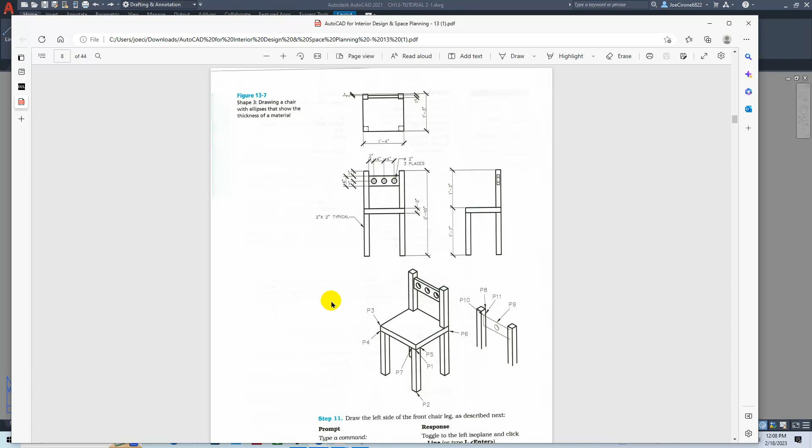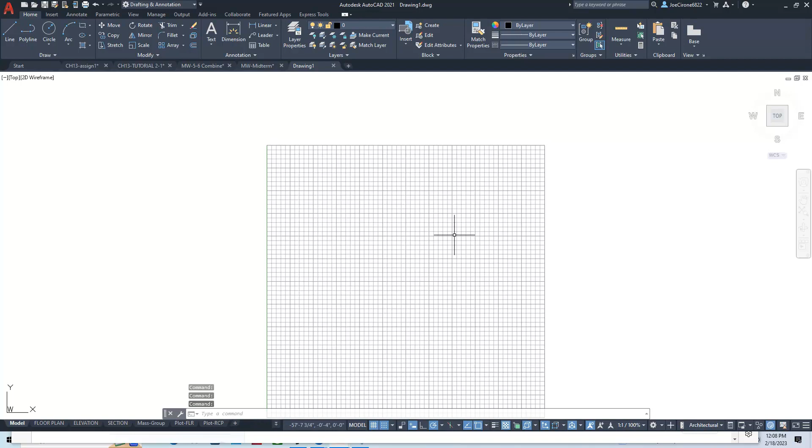But we're going to draw this using solid modeling techniques. Alright, let's get started. You're going to want to use a B-size architectural title block. We have the ARC templates located right here, and you can download the drawing template and open that file. Now, the thing about architectural templates and drawings is that we have the units set up in architectural units. If we look at the format for the units for this title block, it's set for feet and inches, or architectural units.

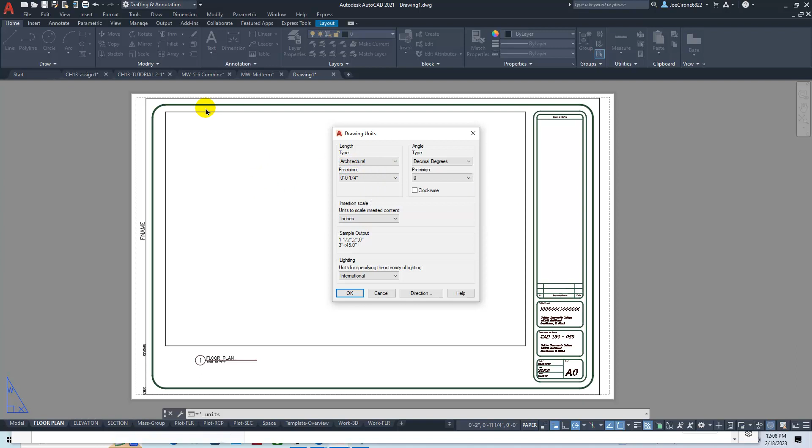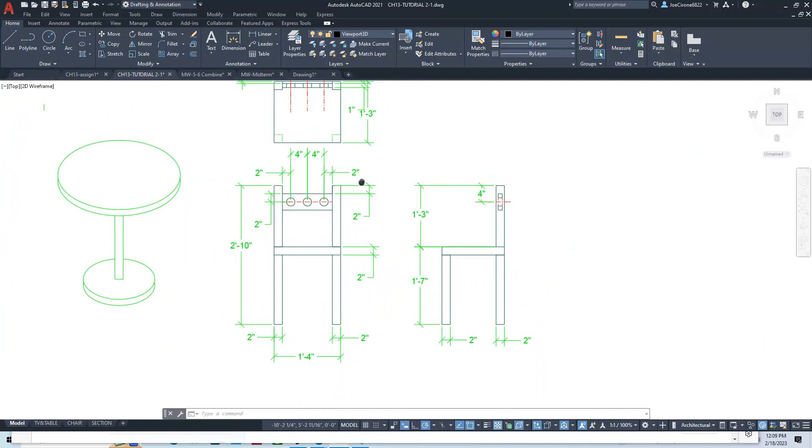Now I've already gotten a good start on this drawing. In a previous session, I went through and have the 2D geometry in the part modeled. So I'm not going to go through the actual aspect of creating the two-dimensional geometry, because I think we covered that in the 134 class.

But the idea would be to draw the object on a furniture layer or an object layer, complete the 2D geometry with the front view, the right side view, and the top view, and then to dimension that two-dimensional object in model space, and then to create a viewport where we would have our two-dimensional geometry shown in the top view, and then we'll create another viewport for the 3D. So let's get started.

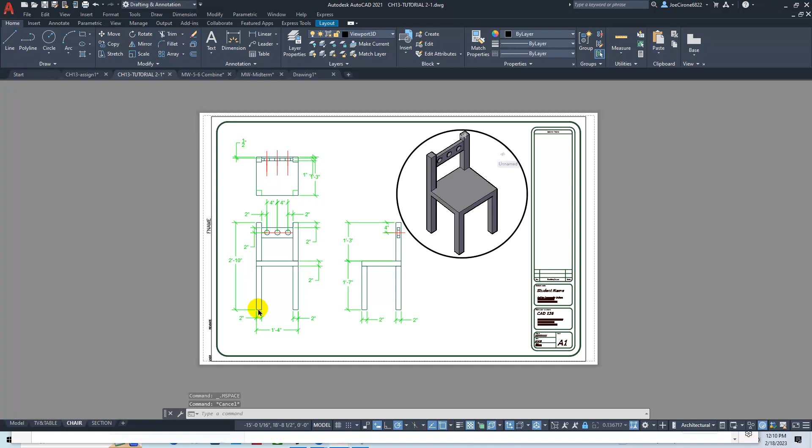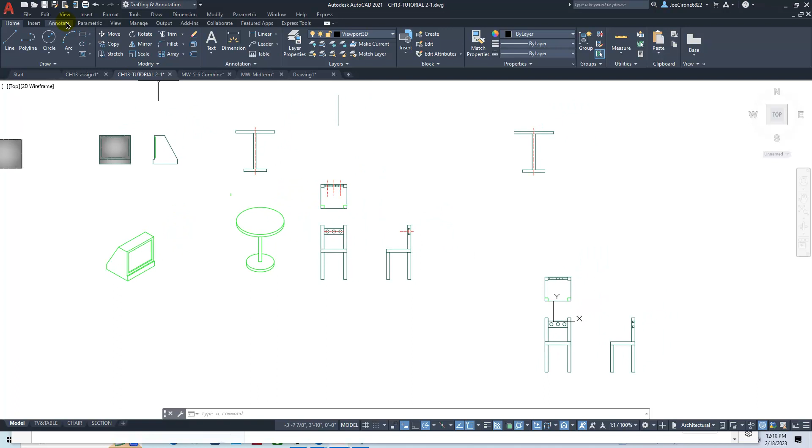If we come back here to the model space, I can toggle off my layer with my dimensions here. I'm just going to turn off my dimension layer. And then I'm going to copy that geometry to an area somewhere on the screen where that's not going to get in the way. So I'm just going to select those, we'll copy them, and then we'll go over here and we'll paste it.

Alright, so we have our geometry for the chair, and it depends how we want to model this. If we want to start off by modeling this from the top view, we can model the height of the chair legs, and then the seat along with the back of the chair. So I think we'll try that from the start.

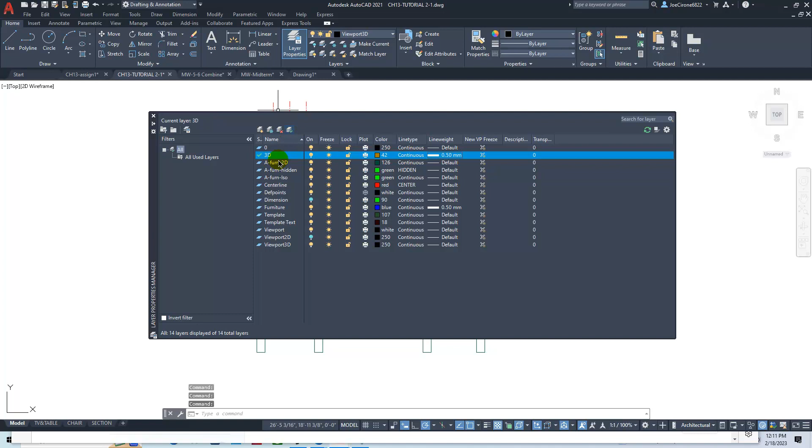So what we'll do is we'll create a 3D layer. You can choose a color that you would like. I'm going to choose this brownish color. I'll use a continuous line type for that, and I'll put a line weight of 0.5 millimeters on that, and I'll make that the default. I'll close out my layer, grab an isometric view, and zoom in on that area.

Then what we're going to do is start to create the model for that. We can go ahead and use press pull to pull those legs up a height of 2 feet 10 inches. So here's the back legs - they go up 2 feet 10 inches. And the other legs go up 1 foot 7 inches. We could subtract 2 inches off of that if we wanted to model to the bottom of the chairs, which I think I'll do.

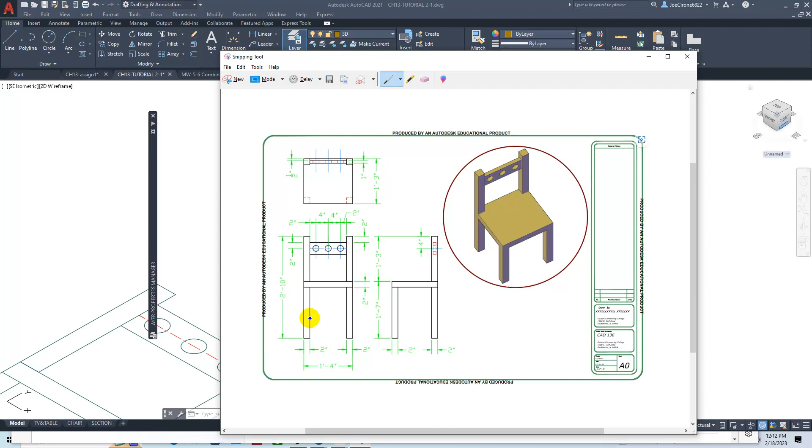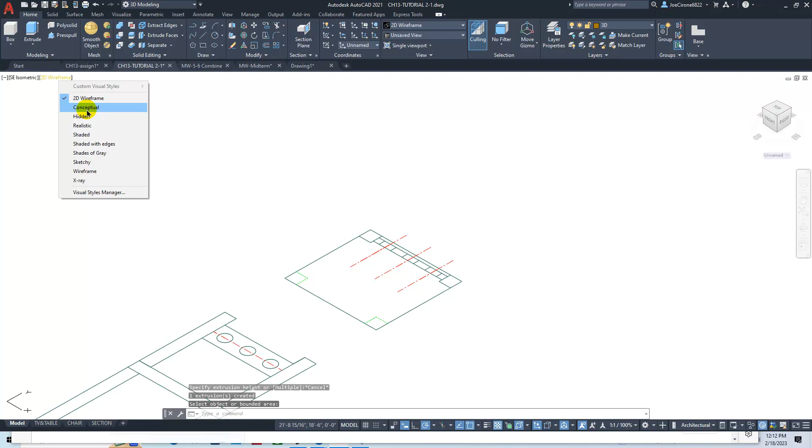So let's start off with the back two legs, 2 feet 10 inches. We're going to use a 3D modeling workspace, in our 3D layer. If we press pull, we can see how that geometry is starting to move up in that direction. We can do this in conceptual - sometimes I'll toggle back to wireframe, because wireframe always works, and when you're in conceptual you can get some graphic card issues depending on your computer.

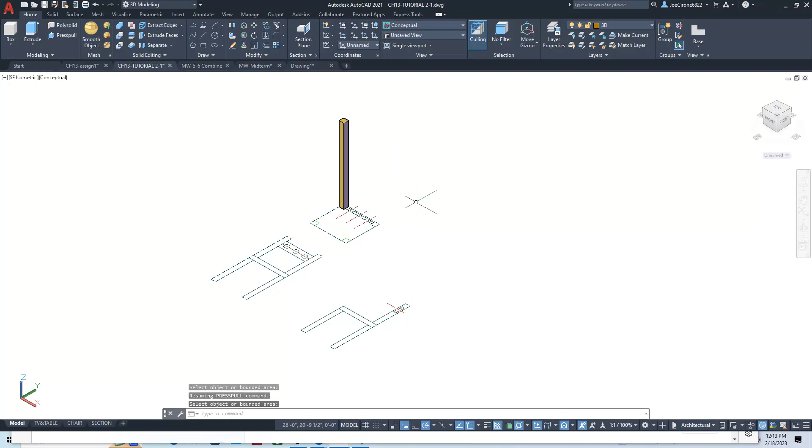So we'll press pull this up a height of 2 feet 10 inches. You don't have to put the quotes on it for inches, it's the default. It'll bring that up 2 feet 10 inches, and we can do that again for the other corner.

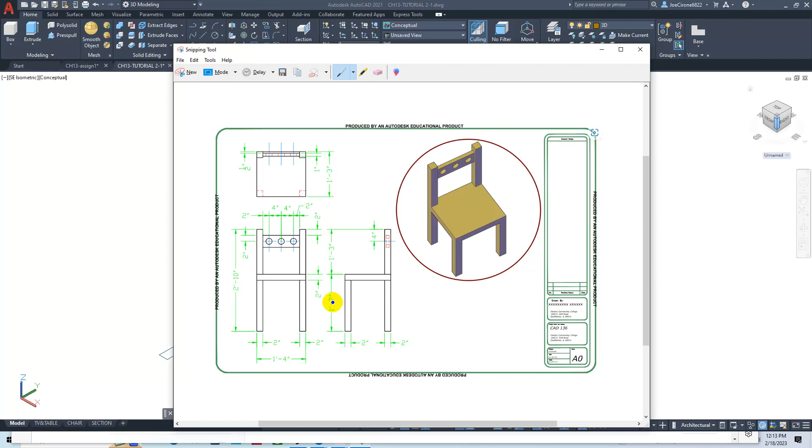Then what we're going to do here is bring up the other two legs, and those are going to be a height of - we're going to make that 1 foot 7 inches, but we're going to take the 2 inches off, so we'll make it 1 foot 5 inches for these two front legs. Again, we'll just use press pull.

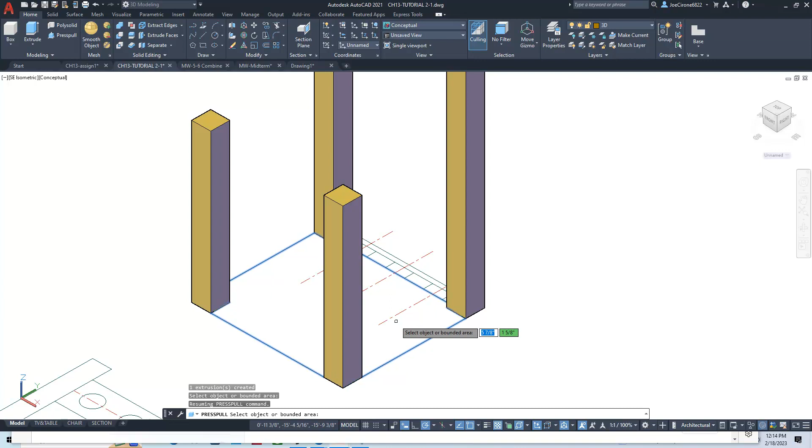For the boundary of the chair shape itself, I'm just going to draw a rectangle around the perimeter rather than sort through all the geometry that I have here.

If you hold shift and push the middle mouse wheel, you can orbit, kind of like you're playing an Xbox type of game. I prefer that method to navigate around rather than going to find the view orbit icon.

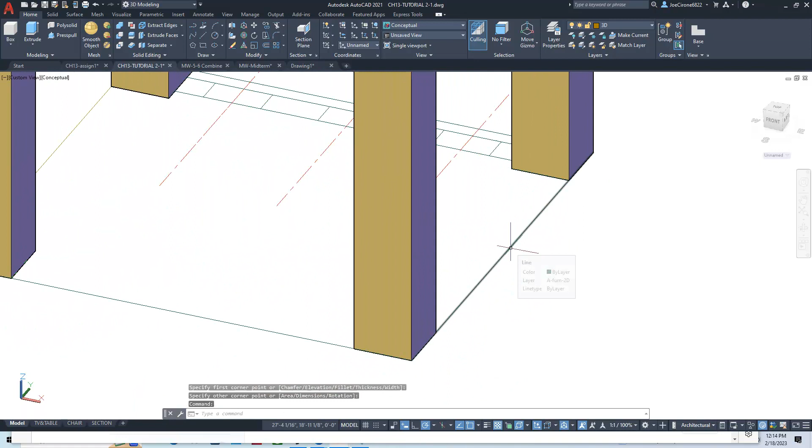It's just quicker. So I'll create a rectangle from this corner to this corner. Then I'll take that rectangle I just created - and that's not it, I'm going to delete that line. It's underneath it. Sometimes you'll have lines on top of lines - you either put them on a layer that's turned off, or in this case I just erased it. You can always get it back and draw another one.

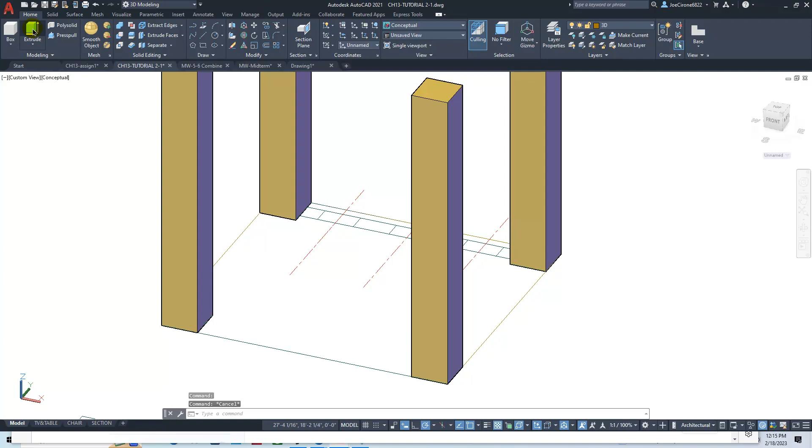Now I'm going to move that, and there's a couple different ways we can do it. If we use press pull, we may get interference from other geometries here. If we use extrude, we can extrude it right here on the floor, up 2 inches, and I think I'll just go with that for now.

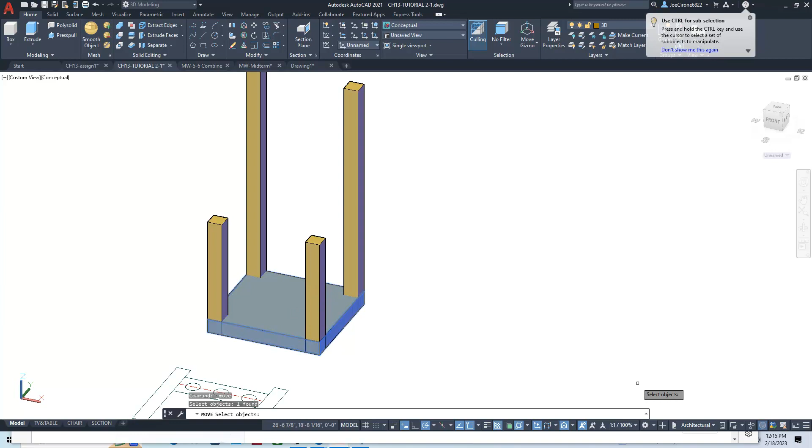In the simplest terms, we can just use move with object snaps, working in the three-dimensional element. So we'll select the move command, a regular move - it works in all three axes - and take it from this corner to this corner right here. Now we've completed the location for that.

Now these are activities here. Since we've modeled it with solids, we can actually union these together, and then we'll have a solid shape that we could 3D print. Right now we've just got these pieces and they're all independent, so I can move them wherever I like.

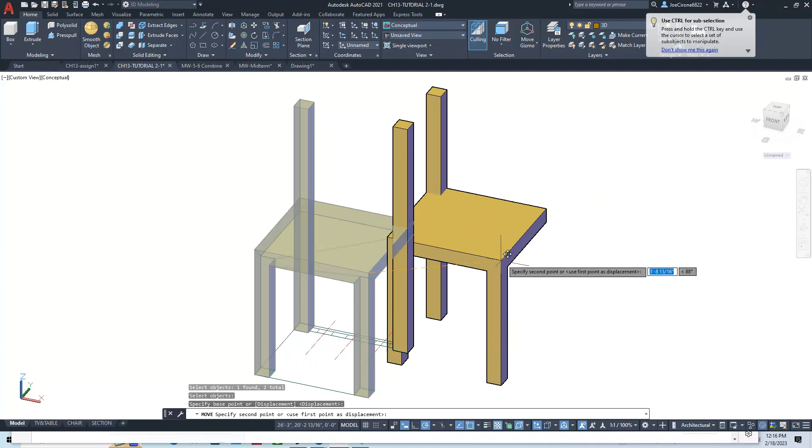Same with the legs on the chair. But if we fuse them together, if we glue them with union, we can union the chair to the legs, and now you can see we've got a bond there. If I move it, you can start to see it's starting to come together. That last piece, I don't know why it came together - I think I grabbed through it.

But we'll union that as well, and you can see it highlights the parts that are fused together, or glued together. Then we'll union the back of the chair. All right, so that's that component.

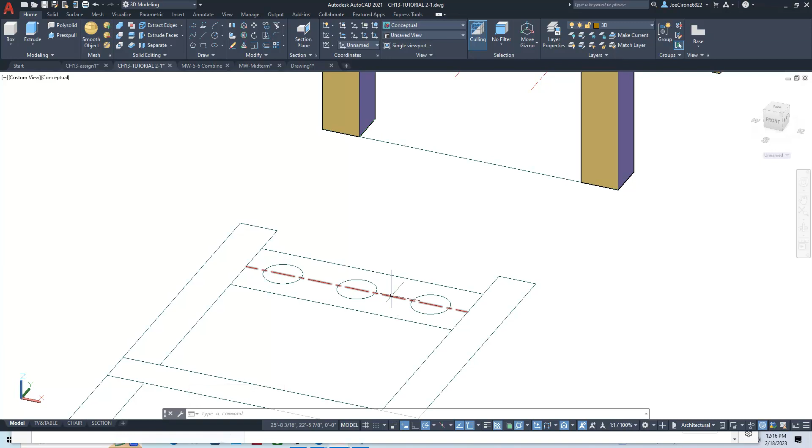The other part of the component is the back, for your backrest right here. I'm going to delete out the center line layer, and we're going to press pull this to a thickness of 1 inch. So here's the back of our chair.

This is really a nice little chair for maybe a young child or something, something to play at a play table - kind of thing we would make in the wood shop back when I was a high school teacher.

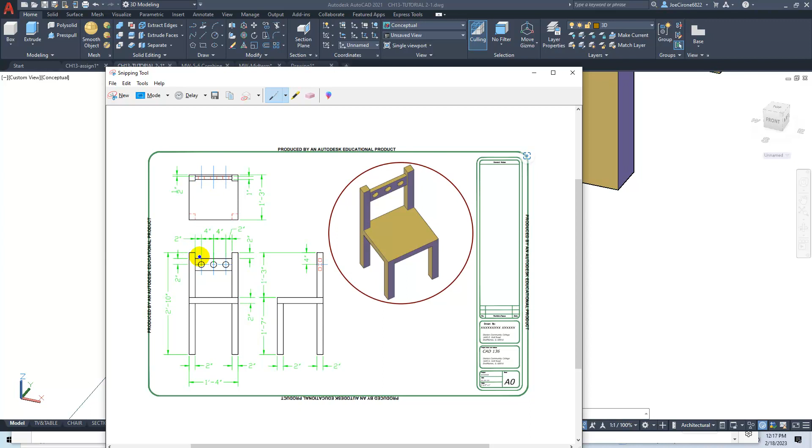The project isn't that complicated as far as being able to create the back of the chair. If you read the dimensions, the thickness of the back here is 1 inch, and it just goes right between these two centers. If you've detailed this correctly, you'll have this type of design.

So when we press pull things, it'll create a region out of the boundary shape and then extrude it. If we were to just straight up try to extrude these different line geometries, what we would get would be surfaces.

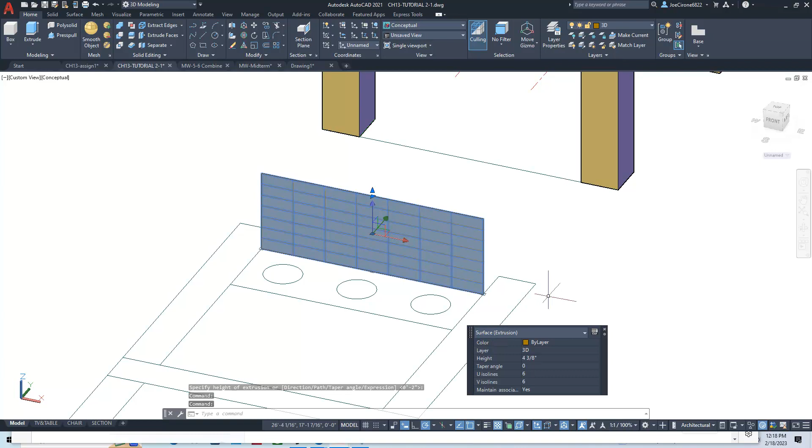Surfaces are fine for doing things like mapping toolpaths and in manufacturing. But for our purposes, we want to use solids because they're better - we can actually use them for 3D printing and other activities. You can still map cutting CAD/CAM tools to these as well, it's just with surfaces you can't do Boolean activities.

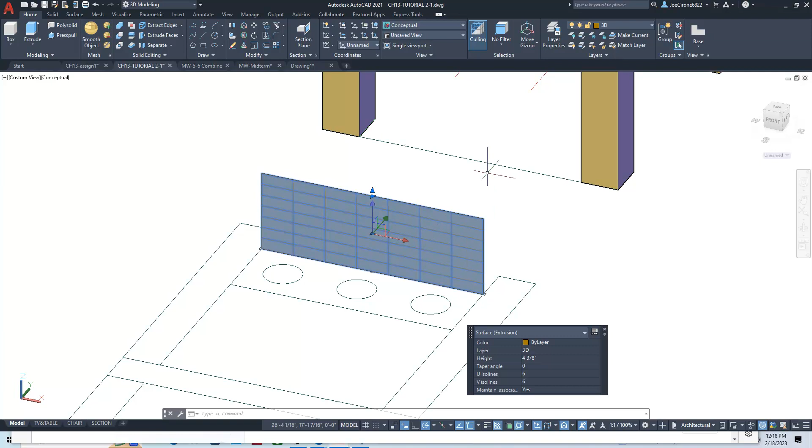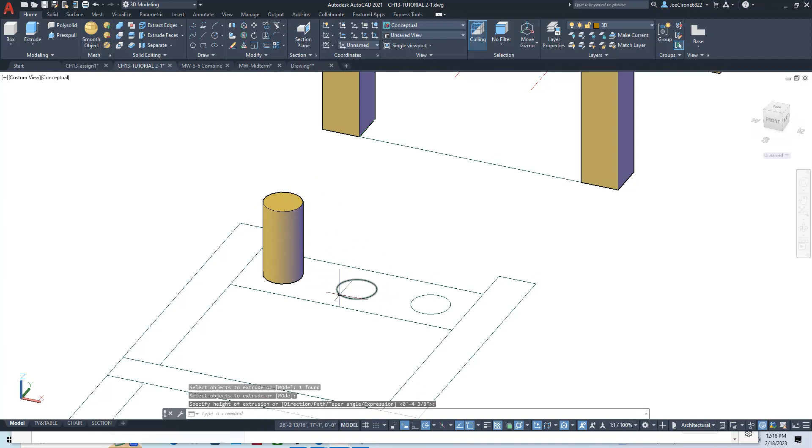The key is to understand that when you extrude something, you need a boundary shape. So for example, if I extruded the circle, it will extrude as a solid because it's a boundary shape - it's got a closed contour. So if we look at that, it's a 3D solid, and those are more powerful, those are better.

So we want to gravitate towards those, just like instead of drawing in isometric, we're drawing in 3D, because we can walk around the chair and model it and create prototypes for that. So with that said, if we were going to create this object with extrude, we would need to region it. So we'd say region, and if I get that command - let me try it again.

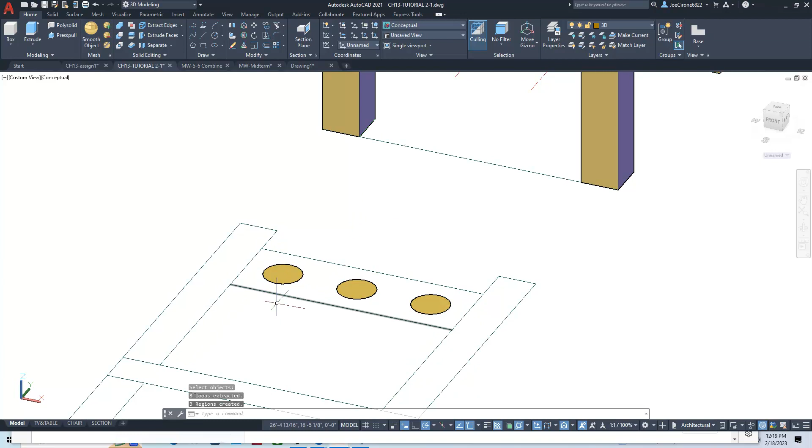We'd select the objects to region it, and it might not quite work because I've got that outside shape that's hanging off. Yeah, it didn't region the outside, it just regioned those inside shapes.

Or what we would do is we would create a rectangle, and then we'd be able to extrude that rectangle. Sometimes you'll get lines on top of lines, so we'll delete that. And then we could extrude that, our 1 inch.

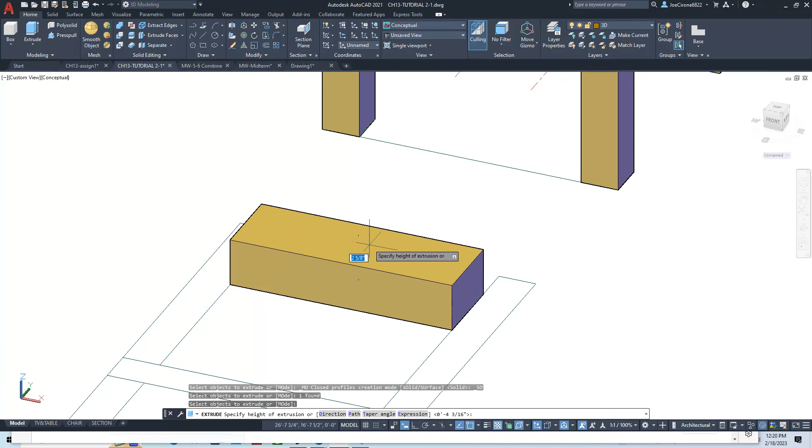If I go out of conceptual and go to 2D wireframe, we could then extrude the other holes. This is the hard way of doing it. Rather than just press pull it, and boom, we're done, I wanted to explain the extrude function, 1 inch, so you can see what press pull does.

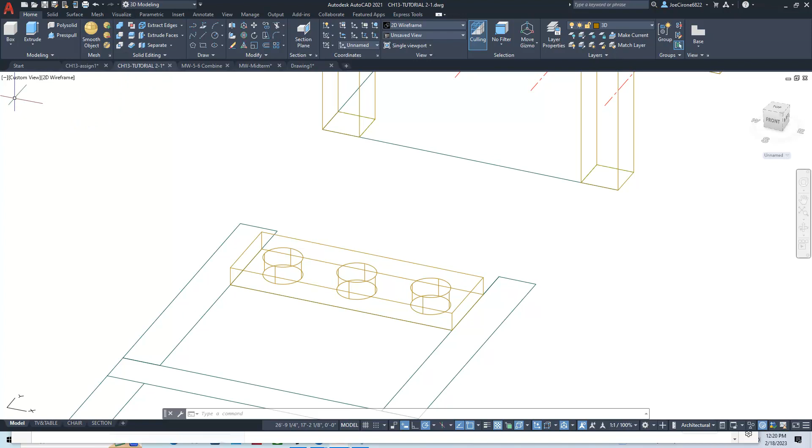What press pull does is it combines creating a region and creating these Boolean activities, which you can see when you make this conceptual. We were able to get everything to the correct thickness, but then we have one more step where we have to subtract, select the large piece, hit enter, and then we have to subtract the hole geometry. I could do all this in one shape, but I find if I repeat it, people will catch it maybe on the second or third time.

So that's a valid shape, and I can move it, and I just kind of throw things around in 3D space like this. If I undo this, I can get back the geometry that I had before.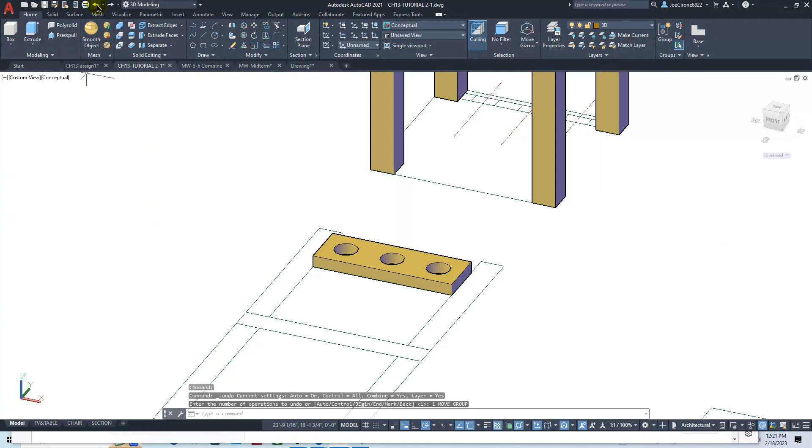And I can just press pull it. Most people will just say, oh, well, let's just do that 1 inch. And that's fine, I just wanted to show the differences between it.

The next thing we're going to do here is we're just going to place this in the right orientation. That's sort of the trick, is how do you locate things in 3D? It's 2 inches from the top edge to the back of the chair.

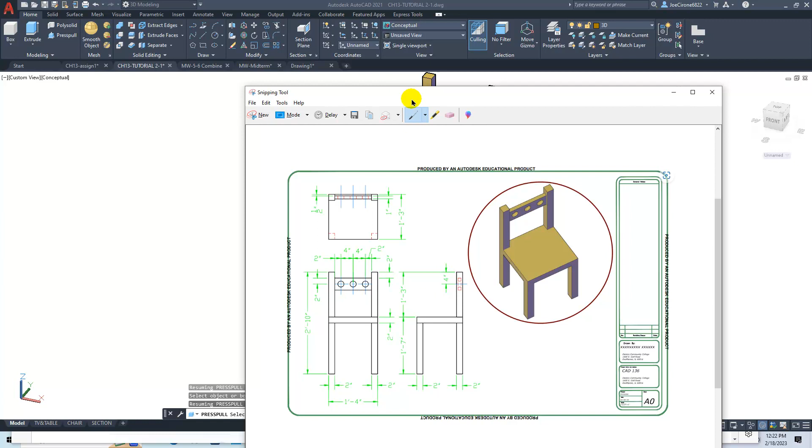The way that I would do it would be I would just move this up, and you can do some 3D rotate commands. If we use the gizmos here, we can use the rotate gizmo, and we can select our part here, hit enter.

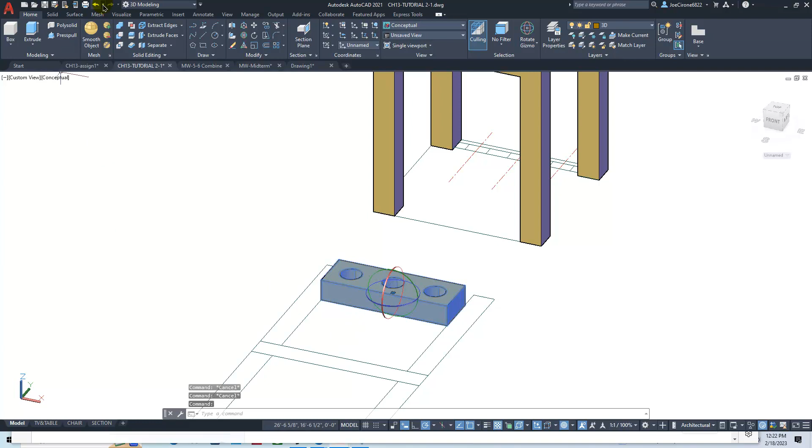I'm not real great with that 3D gizmo. Let's try it again. I use rotate 3D, and I'm not sure what the exact difference is on it. Let's see if we can figure that out. It looks like this thing changed its thickness here, so let me back that up a little bit. Let's just press pull this 1 inch again.

It looks, and now as we complete the rotation, I'm going to go with rotate 3D or 3D rotate.

I'll select the object to rotate. I'll hit enter. I'll place the glyph or the gizmo on the corner. I'll choose the axes to rotate about. So the red one is the x-axis, the green one is the y-axis, and the blue one is the z-axis.

And so I'm going to grab, and you don't have to know which one's which. You can do it by eye. I'm going to grab the red axis and point my polar tracking north, and then I'm going to track it until it comes out here.

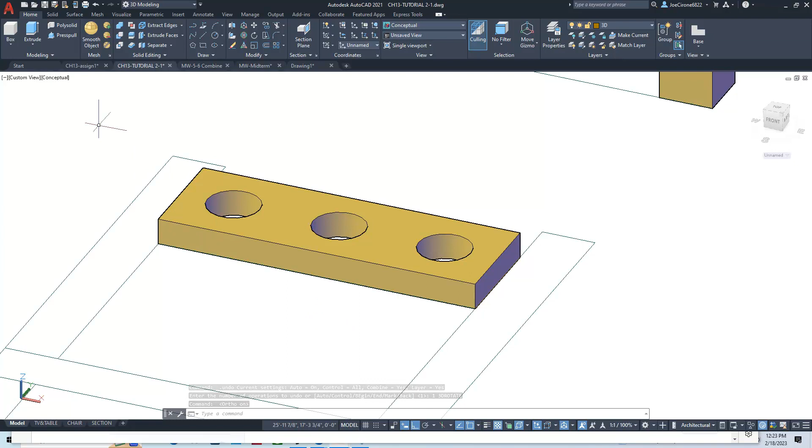Now, if it grabs an O-snap, it's going to fight with you. That's not necessarily a good thing. Another way that we can 3D rotate these is by using ortho. And then you don't have to worry about it becoming like 89 degrees or just slightly off so that it doesn't look right. So again, we can 3D rotate.

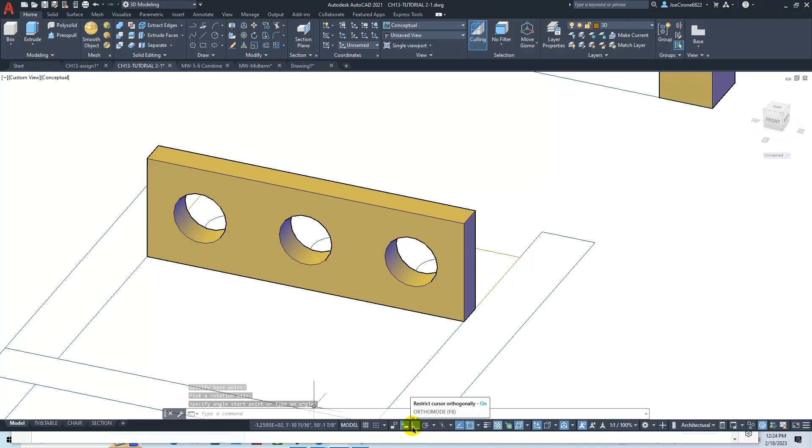Put the gizmo, I like to put it on the lower corners, select the axis, drive it north, and then it'll just go in 90-degree increments now because we have ortho on. Ortho means orthogonal, meaning it'll only work in straight lines, 90-degree angles.

I'm going to turn the ortho off, and then I'm just going to move it with a regular move from the back corner to the back corner like that. And so it's placed here between the two parts.

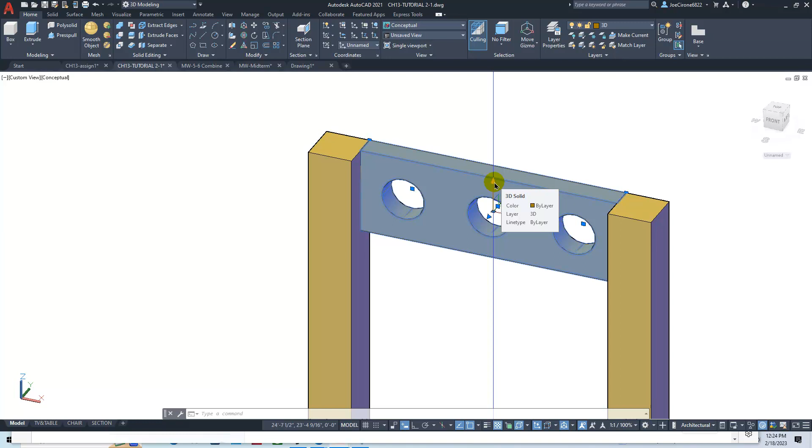And then what I can do is I can shift it down 2 inches, and I believe I can use the move gizmo. If I click on the move gizmo and click on it, and then I grab this rocket in the Z direction, or the Z axis, and then I just start to move it in the direction I want, I can then move it down the 2 inches required.

Now it's not centered on the back of the chair, and so if we were to center it on the back of the chair, it looks to me like our chair is, these are 2 inch by 2 inch square profiles, and we've got a 1 inch thick part here, so we want to move it a 1/2 inch the other way.

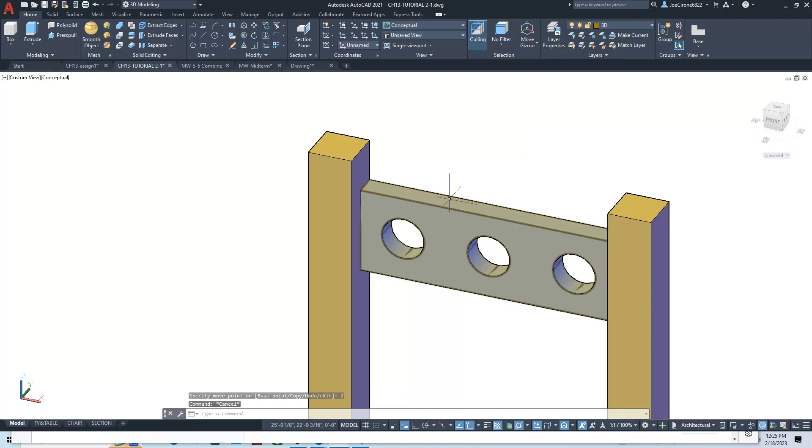So we can get the 3D move gizmo and then move it in this direction. And then we want to kind of track it out there and then type in 0.5.

Hit escape to clear the grips. Shift middle mouse wheel, and you can see if you have that centered on the part.

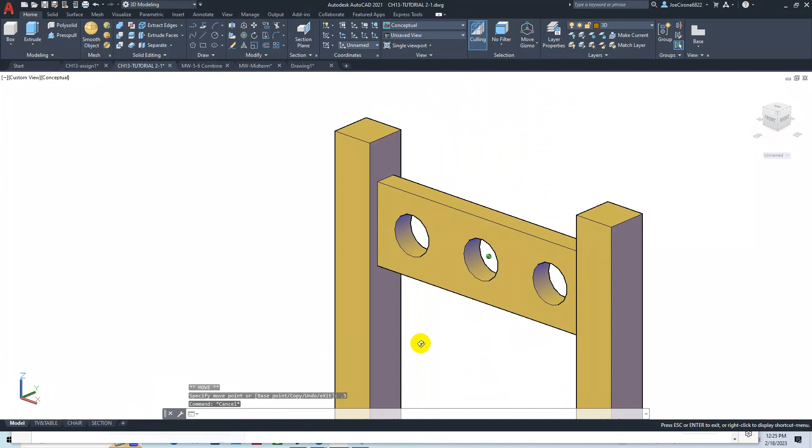All right, so all we have to do is union it together now. We'll union the chair to the back of it.

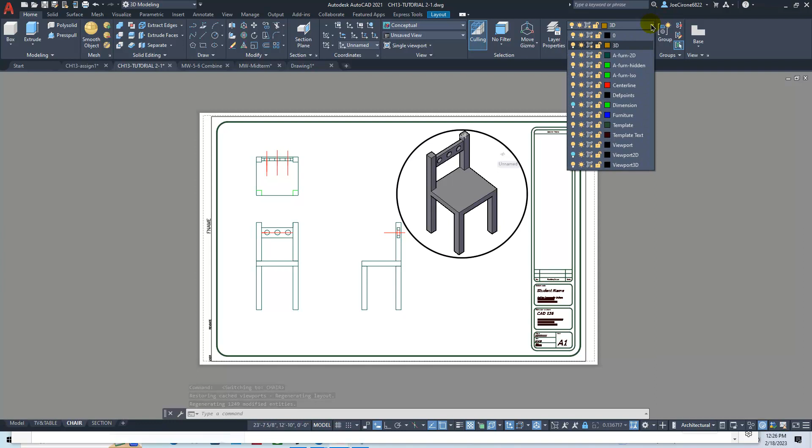And then as we go through and we create our layouts for the chair, you'll notice that my layers are off. So if I come back in here, I can turn on my dimension layers.

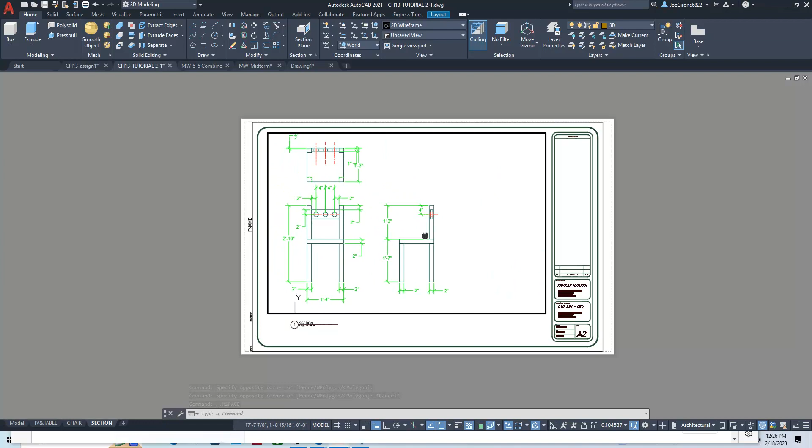And if we were to recreate this, and I was to go with my basic title block, here's your original viewport that comes with the title block. And what we want to do is find our 2D geometry for that, and kind of dial that in and set it at a scale.

So we could start with 1/8 of an inch, which is usually tiny. I think 1 inch equals a foot might be better. We'll set this up at a scale of 1 inch equals a foot so that when we print out the paper, the facilities people can measure it, and they're going to want to do that.

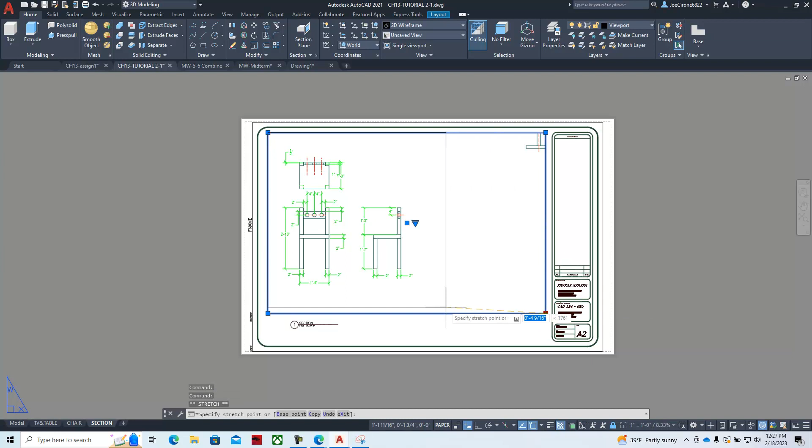So we'll lock that scale in. We'll double click outside of the viewport - you can do this a couple of ways, but I like to avoid having overlapping viewports, so I'll just scoot this one over here. It's on the viewport layer.

I'll hit escape, and then I'll create a circle in paper space, and I'm going to make that on the viewport layer. You can have more than one viewport layer - we'll talk about those as we get artistic with the software.

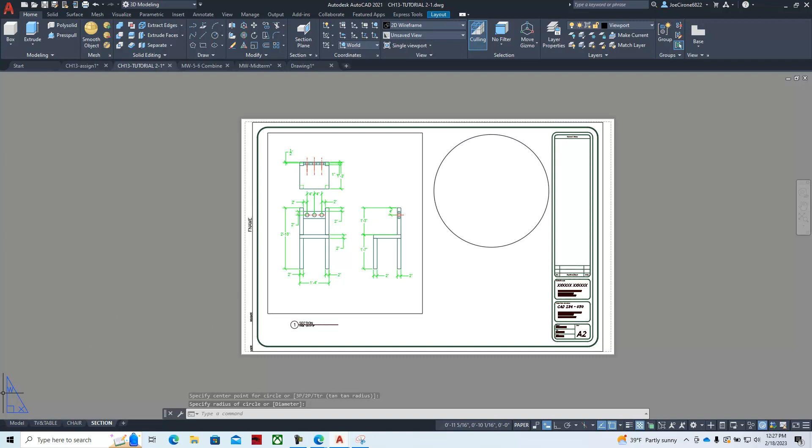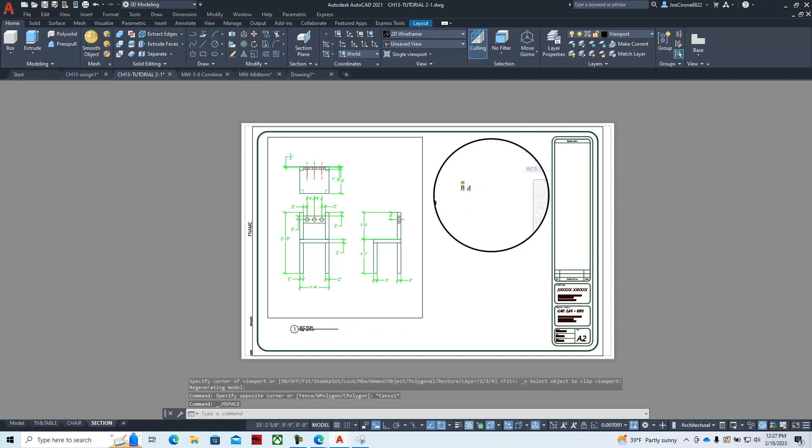Once we create the geometry in paper space, I can come in here, show my menu bar, and go to my viewports and select object, and it will become a viewport. So a circular object or a polygon object, a closed boundary shape can be a viewport. Then I'll double click in there and go find my three-dimensional chair.

And I believe I modeled it kind of right on top of that one there. So if I go and change my viewpoint perspective, we can actually move it in while we're in the viewport.

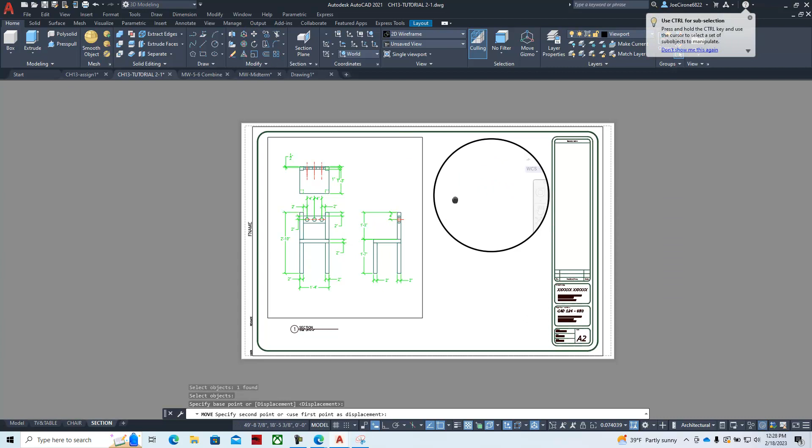You don't necessarily have to toggle into model space, just like that. And then we can maybe zoom in on it just slightly.

And we'll set up the visual style. There's a couple of different ways you can set up the visual style. I'll usually just click in the viewport and then activate the visual style right here for conceptual.

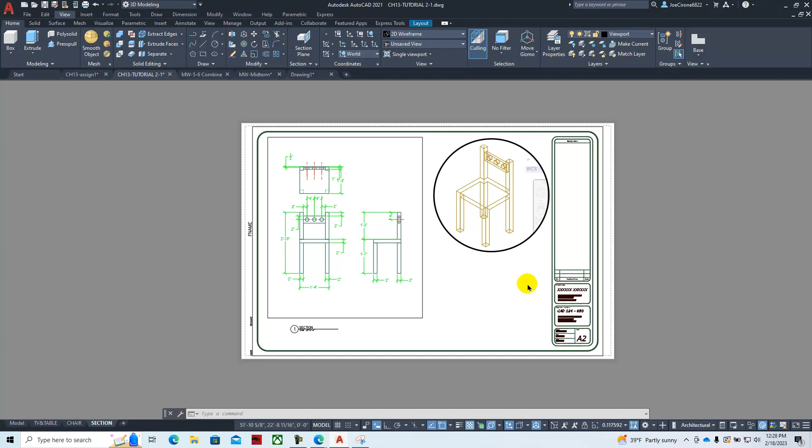But if you were in paper space and you clicked on the viewport itself, and then right click - you don't have to necessarily be on the grip like that - you can go into the viewport display settings. So you can lock the viewport here, and you can then set the viewport shade plot settings.

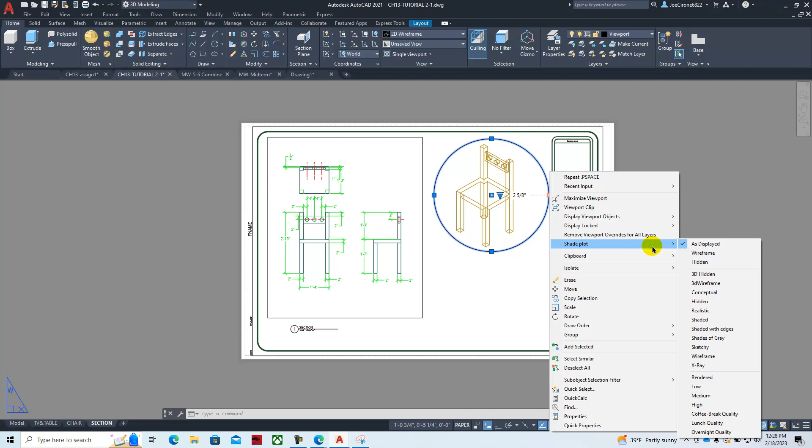And then when it plots it, it'll show it as that. But apparently it didn't update or show it while it's in there, so I'm just going to do it the old way. So I'll double click within that viewport.

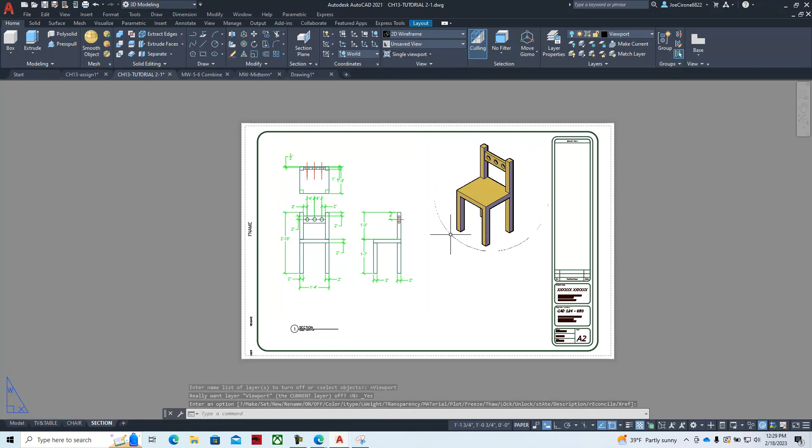It took my other one with it as well, so let me undo that.

And then if we wanted to take this one, rather than turn off both of those, I have multiple viewport layers. I'll put it on a viewport layer that I turned off.

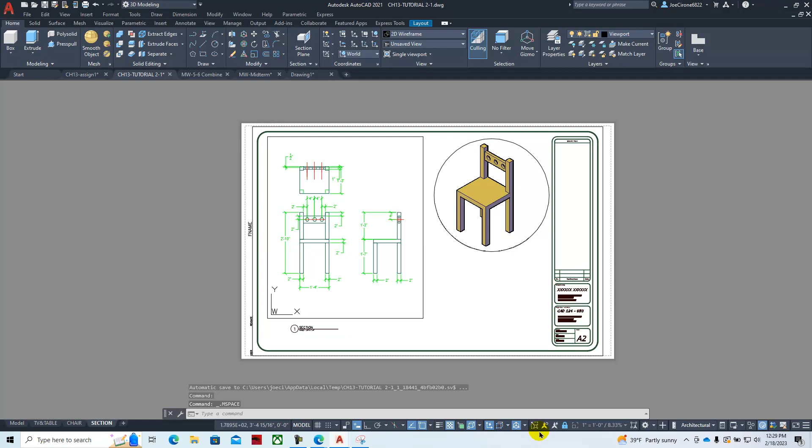Double check your scale, 1 inch equals a foot. Update the title block information so that when we go down to buy our furniture and meet with the people who are going to be installing it, they feel that it can get through the door and will look the way they want it to look in the room.

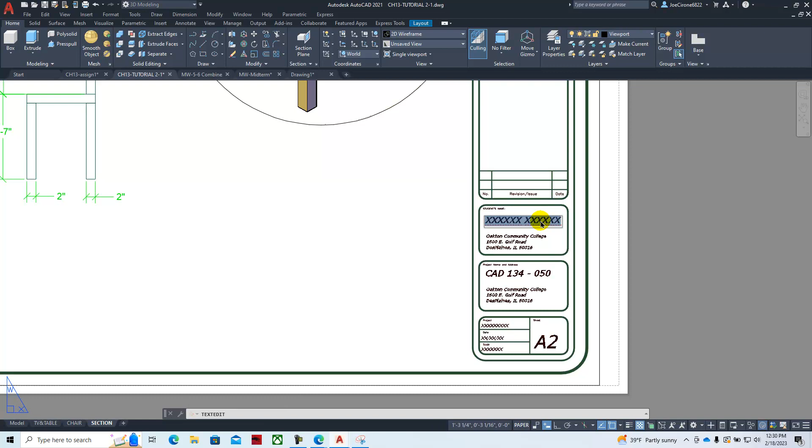Be sure to put your name on it. CAD 136.

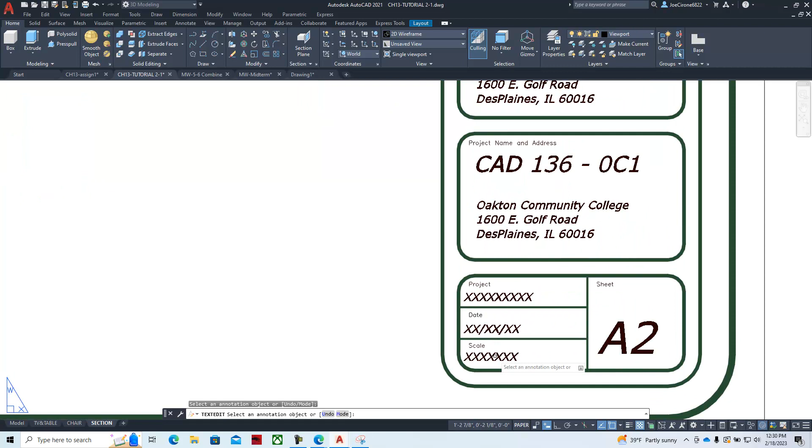Fill in the date, and again put another note with the scale in it. And we'll save this drawing and then submit it to the Dropbox.

Alrighty, so that completes this video tutorial on how to model the chair.